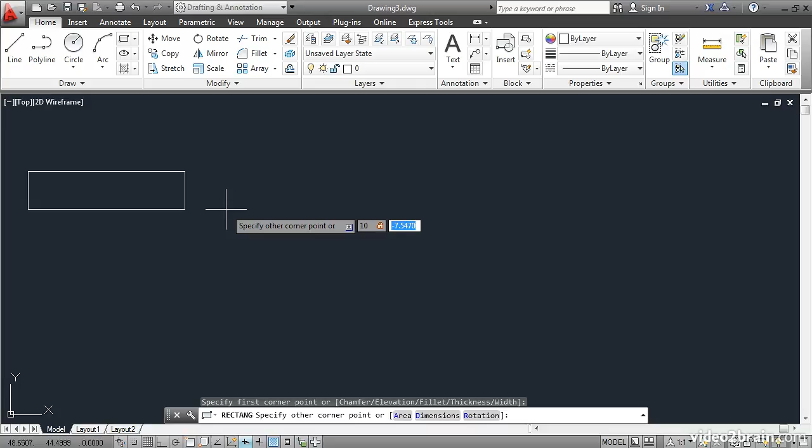This indicates what we're looking at, the x and y axes. So the first number is the x-coordinate, and I'll type in a number. Let's try 10. I'll press Tab to enter the second value, which is the y-coordinate. And here I'll type in 5 and press Enter. So I've succeeded in drawing my first rectangle that's 10 units in length and 5 units in width.

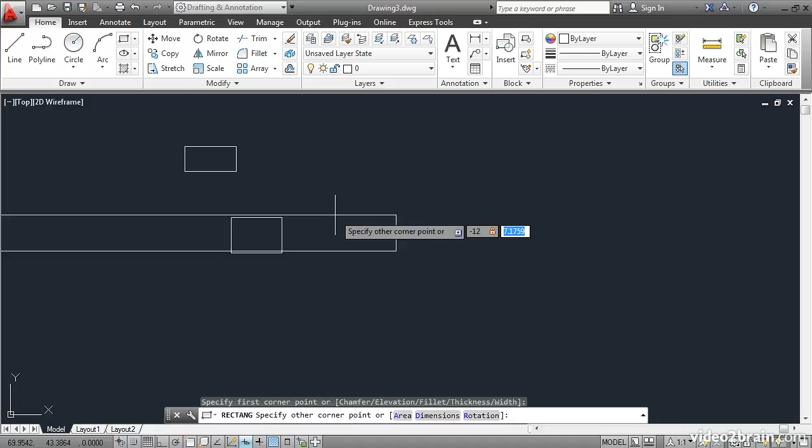Let's try that again. Rectangle, click a first point, and then click a second point. So you can do it freehand like that, or you can use numbers. I'll draw a third rectangle. This time, let's say we want the rectangle to go over this way. So we'll have to specify a negative x-coordinate because it's to the left of the initial point. So I'll type in negative 12, tab, and then positive 8. Enter. So the rectangle went this way in the negative x direction and up in the positive y direction.

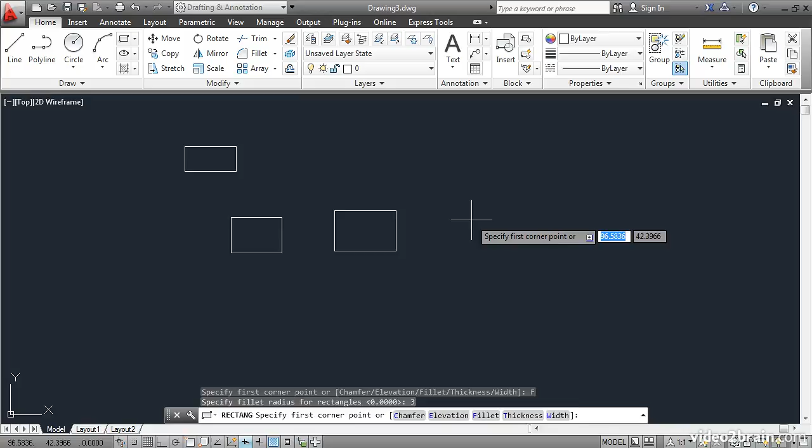Let's try another one, but this time we'll use one of the options. I'll click Fillet, and I'll specify a fillet radius of 3, and then I'll press Enter. Then go ahead and specify the first corner point, and as I move the mouse you can see what's happening. The fillet is a radiused transition between the perpendicular edges of the rectangle. Again, we can specify the dimensions of this rectangle if we want. I'll type in 25, tab, minus 15, enter. You can see right here what it entered, at 25, minus 15. You can do that on the command line if you're not using dynamic input.

I'll turn that off. Let's try another rectangle. I'll click a point here and type at 15, negative 8. So it made the rectangle 15 units in length and 8 units in width, and it went down from the initial point because I used a negative y coordinate. Now, you may have noticed that the last rectangle that I made automatically came with the same fillet radius that I specified earlier. If you want to clear that out, you have to create yet another rectangle and click on Fillet, and then specify the fillet radius as 0, and that will get rid of that curve.

This time let's try a chamfer. I'll click that option, and chamfers work as beveled edges, and they're specified with 2 different dimensions. Usually those dimensions are the same, but they can differ. Let's try 2 for the first chamfer distance and 2 again for the second chamfer distance. Now I'll go ahead and draw the rectangle, and you can see what's happening here. I have beveled edges based on those 2 dimensions that I entered. I'll click to set the opposite corner point. So the first dimension is this length, and the second chamfer dimension is this width.

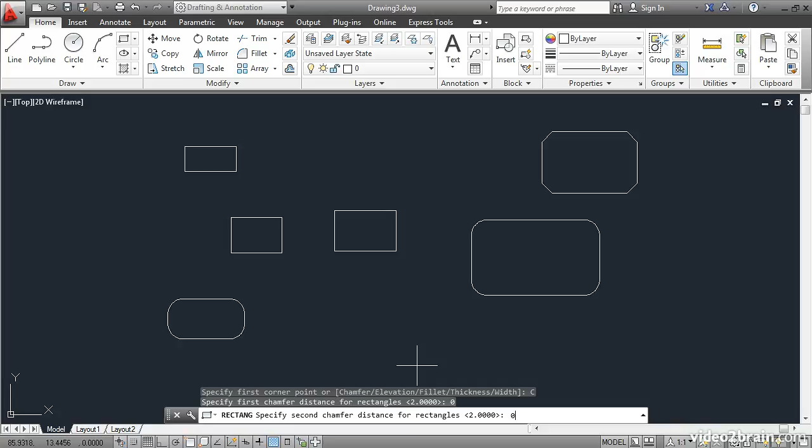Again, if I want to create another rectangle, it will have those chamfer values still in the rectangle command. So I need to clear those out if I don't want to use that. Let's try again. Rectangle, chamfer, 0, 0 again, enter. Now I've cleared those values out. I'll click a point and click again, and our rectangle command is back to normal, if you will.

Now I'll pan over to the side, and let's draw a circle of arbitrary size. Now you don't necessarily need to have a circle, but this will illustrate the point I want to make in regards to the polygon tool. Go up to this flyout and choose Polygon from the flyout menu. And then on the command line it says Enter number of sides. I'll say 4, enter. Specify center of polygon or edge. I'd like to specify the center of the polygon at the center of this circle. So for that I need to use Object Snap. Hold down Shift, right-click, and choose Center. Click on the circle's edge to snap to the center of the circle, which is highlighted in green.

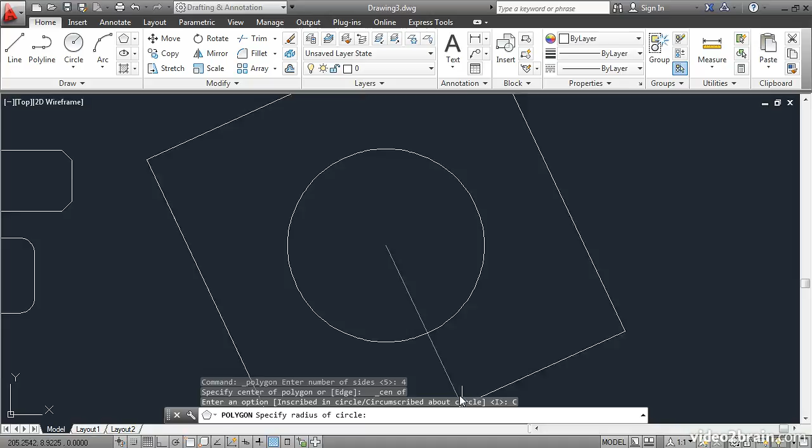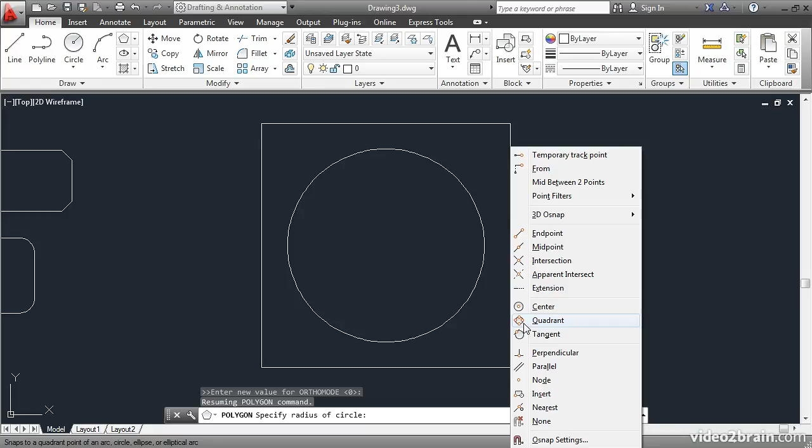Now it gives me two different options, Inscribed in Circle or Circumscribed About Circle. Let's try Circumscribed About Circle. Here you can see that I can draw this square around the outside of the circle in this way. I'd like to snap it so it's precisely the same size as the circle. So to do that, I need to snap to the quadrant point of the circle. Hold down Shift, right-click, and choose Quadrant. Its icon indicates what a quadrant is. They're the cardinal points of any circle or arc. So I'll click here on this east quadrant to specify the radius of the circle. And now the polygon is complete.

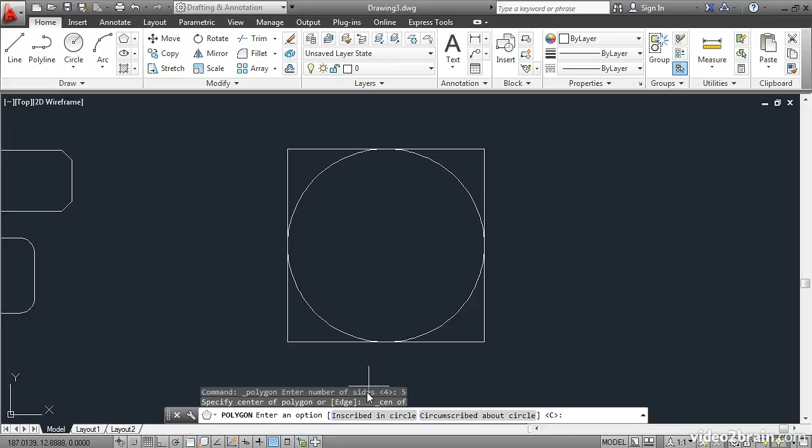Let's try that again, but this time we'll do it inscribed within a circle. And we'll use 5 sides. I'll specify the center point by holding down Shift, right-clicking, and choosing Center. I'll click on the edge of the circle to specify the center of the polygon, and then I'll use Inscribed in Circle, and I'd like to snap it up here, so I'll hold down Shift again, right-click, and choose Quadrant, and click right there. Now we have a pentagon perfectly inscribed within the circle.

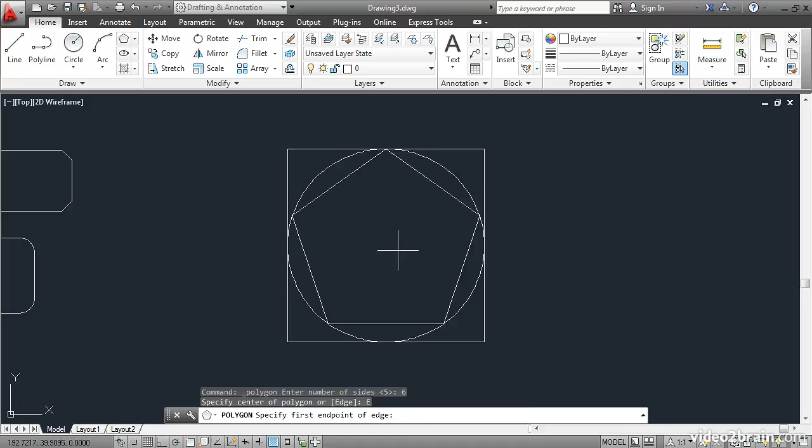There's one other creation method for the polygon tool. That's Edge method. Let's try this. Click on Polygon. Let's set the number of sides at 6, and then we'll use the Edge option. The first endpoint of edge, let's say it's snapped to the endpoint of this pentagon. The second point of the edge will be snapped to the endpoint of this corner. Now we have a hexagon bonded to the pentagon along their mutual edge. You have learned how to create rectangles and polygons and explored many of their creation options.